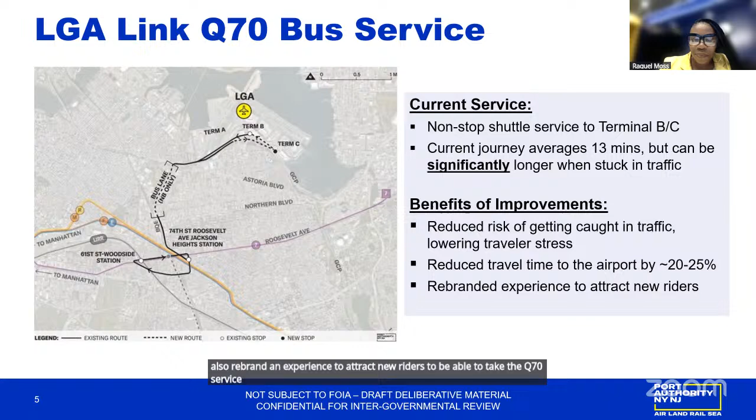To talk about the expert panel recommendations: one was transit signal priority on Roosevelt Avenue and Broadway, which we will discuss later, and will benefit not just the Q70 but other buses as well. A mile-long exclusive lane built on the shoulder of the northbound BQE between Northern and Astoria Boulevard. Frequency improvements as needed, and a new specially designated bus pickup and drop-off area near Terminal C with direct exclusive road access. We'll also discuss our wayfinding and lighting improvements at Jackson Heights-Roosevelt Avenue/74th Street and 61st Street Woodside Station, and lastly, enhancing branding and signage to promote improved services for those who may not currently utilize the Q70.

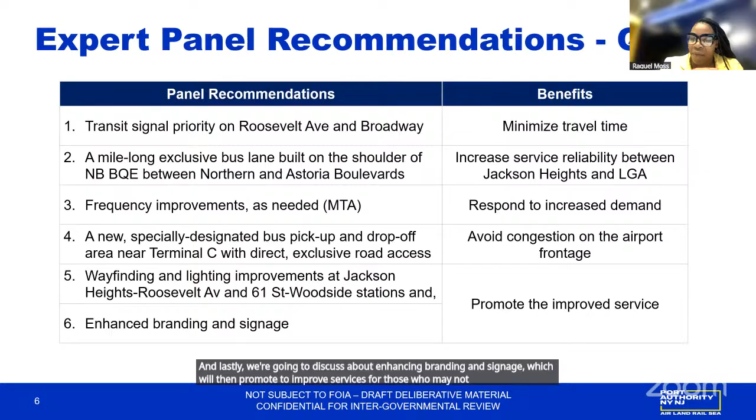Next slide. Now I will turn it over to our Deputy Chief of Government and Community Relations, Hersh Parekh, who will take us further in the presentation. Hersh: Great, thank you Raquel. So I will go over each of those recommendations that Raquel just listed in greater detail. Next slide, please.

So we begin with the wayfinding, signage, and branding. All of you, I hope, are familiar with the Q70 as it currently exists. What we are looking to do is refresh the signage at the subway stations at both 74th Street, Jackson Heights, and 61st Street, Woodside. Also refresh the bus wraps on the buses to make them more visible, more impactful, and easier to recognize, especially for individuals that may not be familiar with the New York City public transit system. This is all intended to help increase ridership on the bus.

So we will be doing this type of improvements as part of this project. These images you see on the screen are conceptual. We're still refining some of these in collaboration and coordination with the MTA. But this is going to be a critical part of attracting new ridership on the Q70, which already is quite popular in terms of access to the airport. In furtherance of our goal to reduce the number of personal vehicles and other vehicles that travel to the airport and encourage people to rely more on public transit, these improvements will help in that endeavor. Next slide, please.

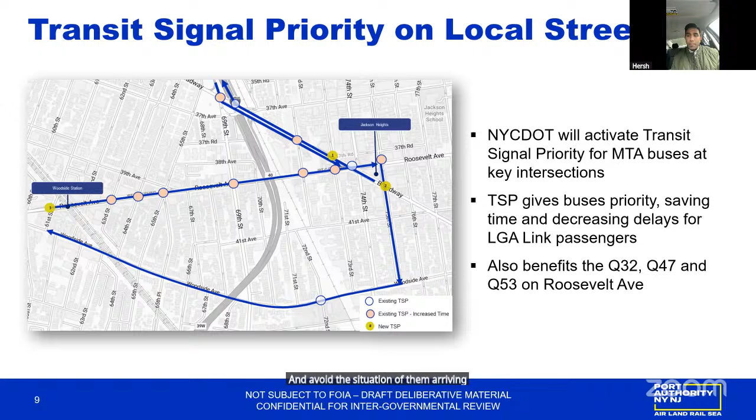As Raquel noted, this TSP will also benefit a number of other bus routes that travel on Roosevelt Avenue, specifically the Q32, the Q47, and the Q53. I'll just note it's critical to highlight the fact that the Q70 is used heavily, not just by airport customers looking to catch their flight, but also by airport employees, many of whom live in the communities around these stations and around Queens. These improvements will help them get to their job faster and more reliably, and avoid the situation of them arriving late or facing any issues because of that.

Next slide, please. I talked about how popular the bus is amongst both customers and employees. You can see on this line graph that ridership on the Q70 has increased steadily over the years, with 2024 being the highest ridership to date. And the fact that it's also free to ride helps significantly to improve and increase this ridership number.

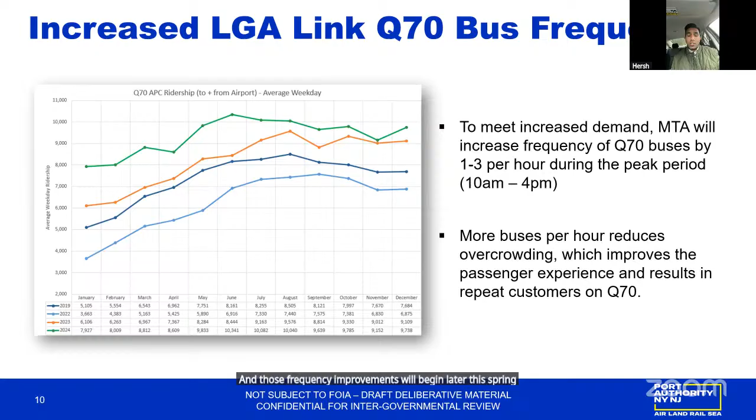As we see this growth in demand, what we want to avoid is buses that get too crowded, especially during the peak period between 10 a.m. and 4 p.m. So to meet this growing demand, the MTA has agreed to increase the frequency of Q70 buses during that peak period. Again, this is all in an effort to increase ridership and increase capacity by reducing overcrowding and improving the passenger experience on the Q70. Those frequency improvements will begin later this spring, sometime in June. So this is right around the corner. Next slide, please.

So here we're going to spend a little more time going into greater detail. Raquel noted the bus lane on the BQE, the northbound BQE between Northern and Astoria Boulevards. This was a critical recommendation of the expert panel, and we do see that sometimes the bus can get caught up in traffic on the BQE as it's going north towards the airport. Because of that situation, many customers on the bus will avoid it because they don't want to miss their flight or be late for their shift at the airport. So we have been working with New York State and New York City DOT to develop a concept that can achieve the goal of a bus lane. We'll go into greater detail on that in the next slide.

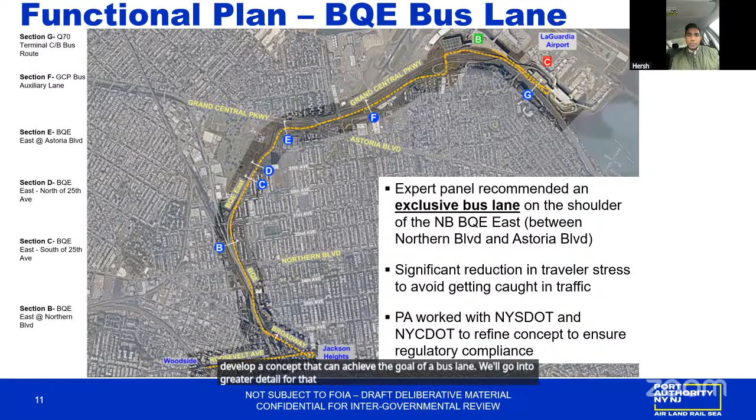So we start at Northern Boulevard. What we will be looking to do is essentially create a bus lane on the shoulder. It is not possible to widen the BQE for many reasons. However, there is a shoulder that currently exists on the northbound BQE. So in order to accommodate a bus lane, there will be some restriping done such that the shoulder on the left-hand side of the road will be narrowed by a few feet, by 3 feet, as you can see. And the shoulder will be widened by 3 feet to accommodate a bus. What's critical to note here is this will not be a full-time bus lane.

This will be a bus lane available only for buses when there is congestion and traffic on the BQE. If traffic is free-flowing, the bus will travel as it normally does on the regular travel lanes. But if there is traffic, slowdowns, and stops, the bus will be able to transfer over to the shoulder running bus lane and continue to reach its destination.

There will be signage added to identify whether the bus lane is active or not, noting it's for buses only. We will work with the MTA to ensure drivers are trained to know when they are able to access the bus lane versus when it's not available.

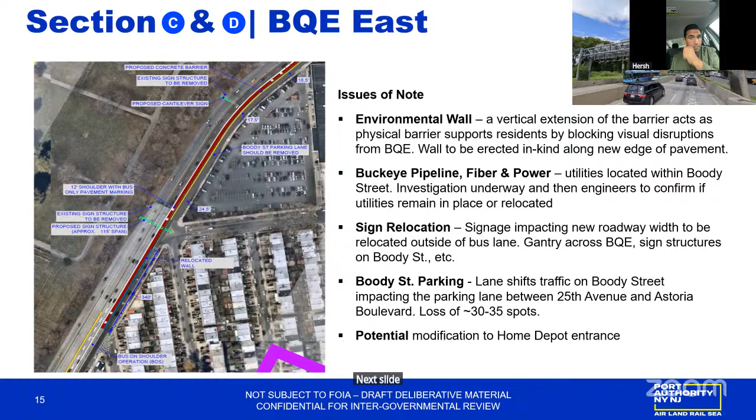So next, after the bus passes 25th Avenue, it will exit and approach Astoria Boulevard. Here, what we will be looking to do is create a bus lane as it exits, allowing it, when it exits the BQE, to have a streamlined pathway to then enter the Grand Central Parkway. You can see the top cross-section image showing current conditions, and the bottom showing the proposed conditions that create a separated bus lane, while still maintaining the vehicular travel lanes on both sides, on both the BQE exit ramp and on Boody Street.

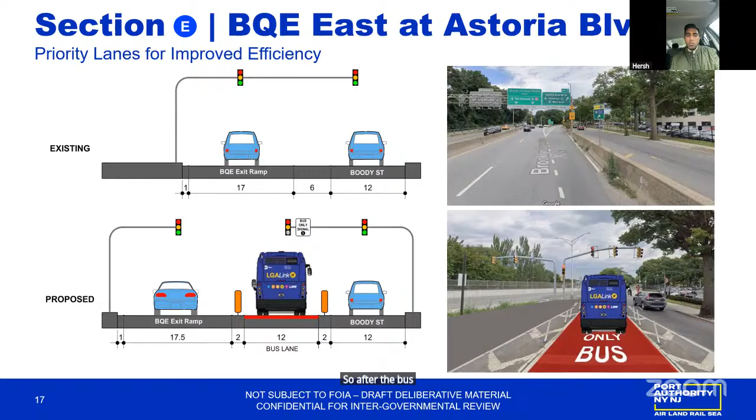This is an area where there are three different signals here, so we just need to make sure one on Boody, one on the Grand Central, on the BQE exit ramp, and one on Astoria. We will work with City DOT to ensure that the TSP can effectively serve the bus while also minimizing impacts on the other vehicular traffic that uses this corridor.

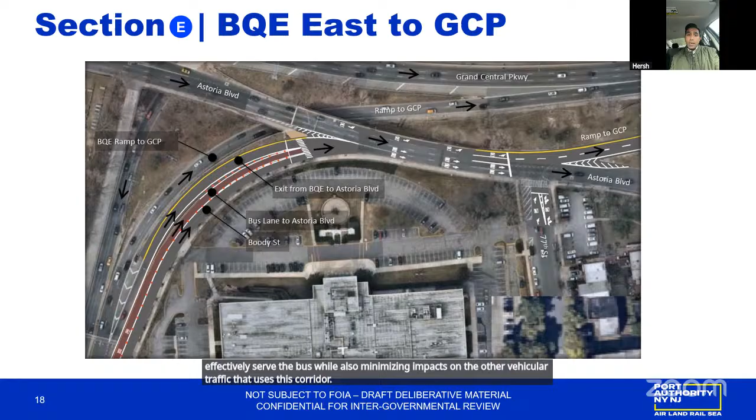So then on the GCP, the bus will enter the Grand Central Parkway on its way to 94th Street. Here, what we're looking to do is create an auxiliary lane. This lane is basically a lane that allows for traffic that is entering at one exit ramp and exiting at the immediate next exit ramp.

So this is essentially the bus will enter the GCP from Astoria Boulevard, and the next exit is 94th Street. This will allow the bus to remain in that lane without having to cross over into other lanes of traffic, allowing it to more efficiently and in a faster way exit the GCP on its way to LaGuardia Airport. This lane is different from the shoulder bus lane I mentioned on the BQE because this lane will be available for all traffic entering at Astoria and exiting at 94th Street. It prevents people from having to cross over, which can be unsafe at times if you're familiar with this interchange. By remaining in one lane from one entrance to the next exit, it allows for more streamlined operation, and again an improved experience on the GCP for the Q70.

And this is just another picture showing how that would work. What we would do is take the existing shoulder and convert that into an auxiliary lane, which would allow the bus to get to its exit quickly.

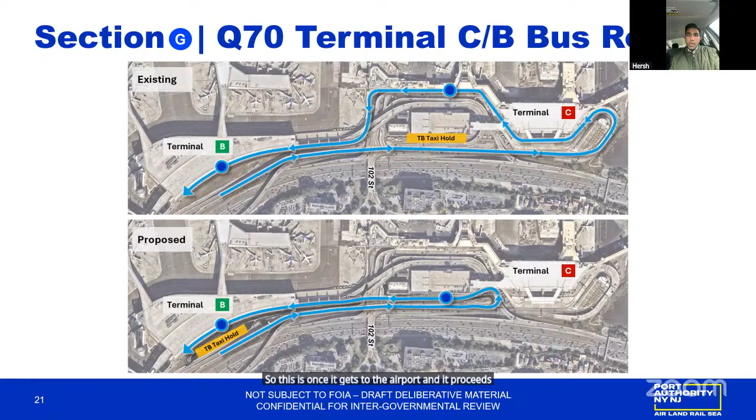So that is the overall project. Let me turn it back over to Raquel to close us out.

Thank you, Hersh. So our next steps are we're going to continue engagement with the community, informing them of the Q70 and the ground access program. Our next meeting would be on May 19th, which is next Monday, with the East Elmhurst Corona Civic Association. And then we're going to still have the planning and design efforts which will continue to propose the new Astoria Ditmars Boulevard shuttle service.

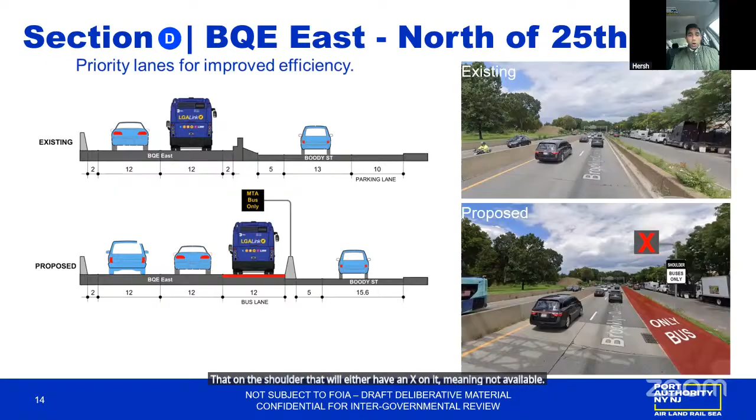If we can go back to that, there will be signage on the shoulder that will either have an X on it, meaning not available, or something like 'bus only lane.' I forget the exact terminology, but it basically says it's available, and that will be based on traffic conditions monitored remotely. So someone watching traffic conditions will know there's heavy congestion or the speeds on the road have dropped below a threshold we haven't quite decided yet, and they'll be able to flip the switch so the sign changes from X to bus only lane, or whatever the language says on the slide. That's how it will be determined.

Okay, great, thank you for clarifying. My follow-up question is simply understanding the times when they are allowed to use that lane.

Are the Q70 buses going to become equipped with cameras? I know there's been an issue with the Staten Island Express buses along the Verrazano and the Gowanus Expressway into downtown Manhattan. They have a purpose bus lane that's sometimes protected with concrete barriers, sometimes not, and anyone who rides those buses will tell you there are often drivers slipping in and out of the lane to bypass traffic. So I'm wondering if there will be any automated enforcement mechanisms to prevent drivers—aside from legitimate emergencies—from simply using the lane to bypass traffic.

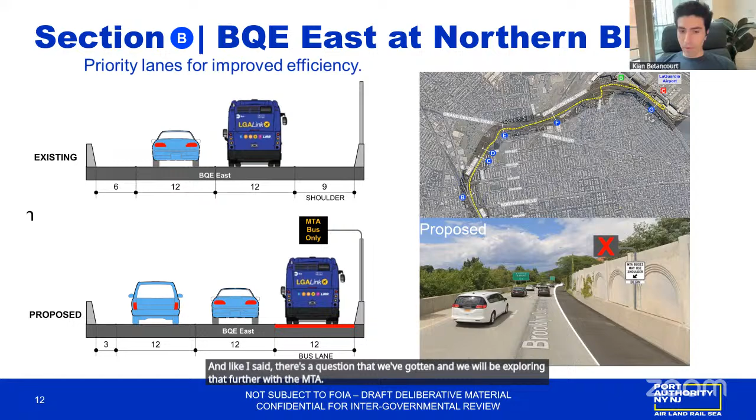This is a question we've received. I don't have an answer for you right now on whether the buses will be equipped with the cameras that can snap a picture if a vehicle that shouldn't be in the lane is using it. I know this is something the MTA has been looking at across their network, but I don't have an answer about whether the Q70s will be equipped with that technology. As I said, this is a question we've gotten and we will explore it further with the MTA.

Thank you. All right, Adam, you're up.

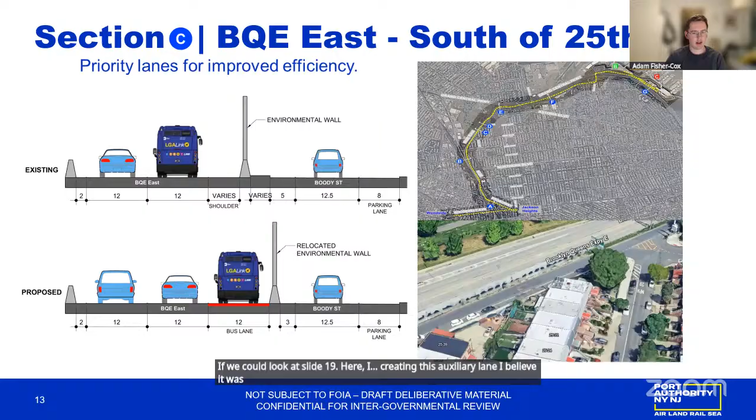If we could look at slide 19, regarding creating this auxiliary lane, I believe in section F, I'm wondering where the space is coming from. It looks like we're kind of widening the highway there, which feels a little counter to the goal of minimizing the amount of cars and traffic in this area. I'm curious what the existing conditions are here, where this additional space is coming from, and what the construction would look like to create this additional space on the roadway.

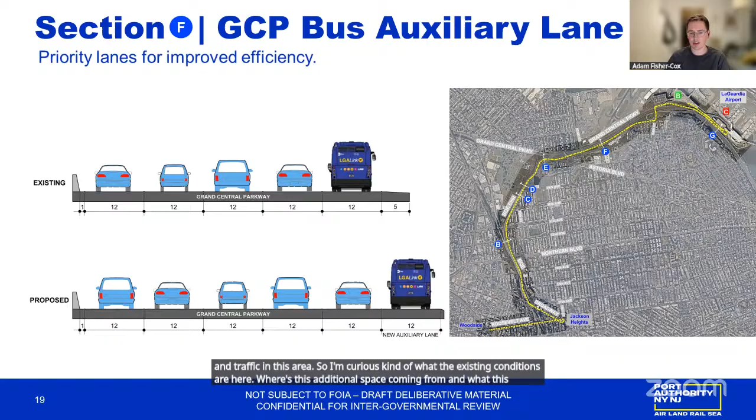Yeah, we can go to the next slide, Louis. You can see on the far right-hand side there's a shoulder area there, which is sometimes where DOT stores equipment for work they might be doing. Oftentimes you'll see a lot of trash in the brush on the right-hand side. So what we're doing is repurposing that area for the auxiliary lane we described.

Okay, so all this is already paved and exists as is, it just needs to be cleaned up and repurposed? That's correct. We've talked again with state DOT—Vaughn College is up there on the hill as well. If this is a way to also reduce the trash that often piles up in those brush areas, I think it's going to be a welcome change. But yes, this is existing pavement, just repurposing it from a staging and storage area for equipment into a proper auxiliary lane for the bus and other vehicles as well, because this is not going to be exclusively for buses—it will be for all vehicles entering at Astoria and exiting at the next exit.

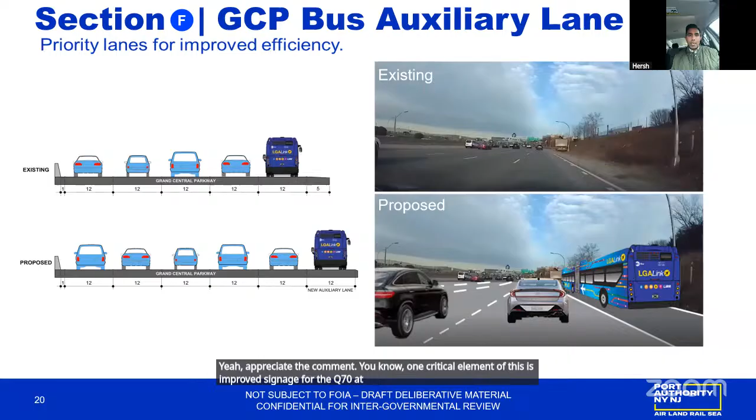Yeah, appreciate the comment. One critical element of this is improved signage for the Q70 at both 74th Street, Jackson Heights, and 61st Street, Woodside. Really highly visible, high impact, colorful, easy to follow, easy to understand - whether you're new to the city or English isn't your first language, just make it easy to understand. So signage, both off the airport at those stations and on the airport, to make the Q70 as visible and attractive as possible, is part of this project.

Okay, sorry. I was just going to say we agree that signage is critical for anybody, whether you've been to LaGuardia 100 times or this is your first time at the airport. So we are always looking at ways to improve the customer and passenger journey, and signage is a critical part of that.

Okay, do you not stack the buses? Because at Roosevelt and 61st, you have the 53, the 70, the 32, and it seems buses are stacking up, waiting to start their route, but it's just adding to the congestion. So if they can be put at an auxiliary site until they start their route, that would be preferred also.

Yeah, appreciate the comment. Again, our focus for this project is improving the journey on the Q70. But we understand and appreciate the comment about the conditions at Woodside, and if there are ways that can be addressed with the MTA, we can take a look at that. But really our focus has been the journey from the subway and Long Island Railroad stations to the airport. Okay, thank you.

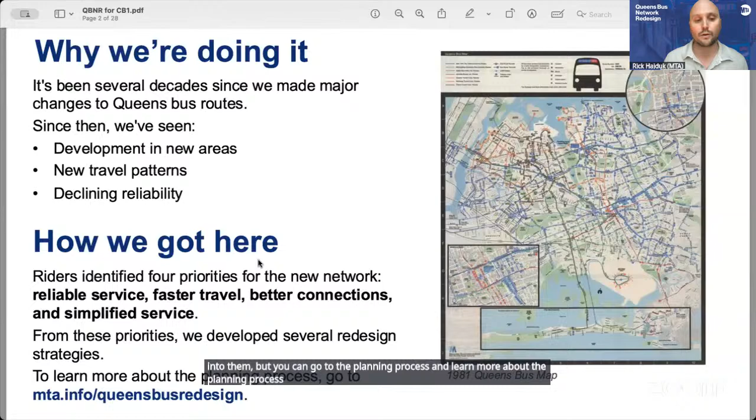So as you are probably all aware, it's been a long time coming for us to implement this project. It is now on our 6th year since launching in 2019. We have developed multiple iterations of the plan, starting with the original draft plan off of the existing conditions report, the new draft plan based off of public feedback, and then the proposed final plan based off more public feedback. And again, after more public feedback, the proposed final plan and addendum, which, as Megan had mentioned, we had published in December of 2024 and brought to the board for an affirmative board vote in January of 2025.

We are now preparing to implement this project, and we're going to all of the community boards in Queens to let them know, give them updates on the implementation process and what to expect. We will be implementing this project in 2 phases, beginning on June 29th. That will be the first phase. The second phase being on August 31st. All of this will be followed by a post-implementation analysis.

This process has been heavily influenced by the community. We've had 250 total events with various communities throughout Queens. This included pop-up events, open houses, workshops, community board meetings, stakeholder engagements, and meetings with elected officials. We received over 18,000 comments, and that's how we got to this point where we brought it to the board, and that's what the new network will look like.

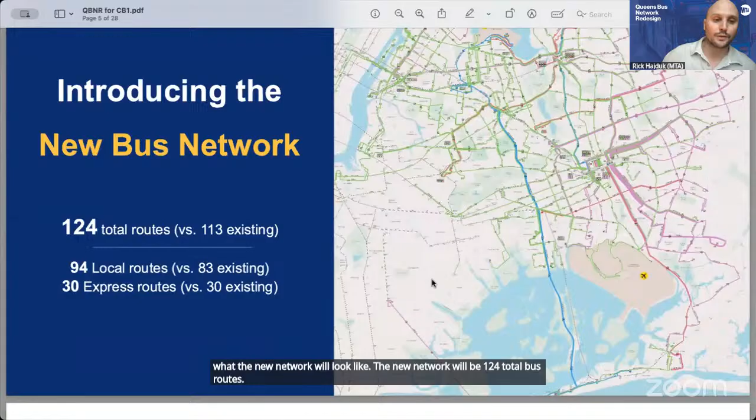The new network will be 124 total bus routes versus the 113 existing. There will be 94 local routes and 30 express routes. This new network will expand access for the people of Queens. 124,000 more residents of Queens will have access to the all-day frequent network, which has a bus that arrives every 10 minutes or better between 6 a.m. and 9 p.m. And 68,000 more residents will have access to the 24-hour bus network after this full plan is implemented on August 31st.

So what changes should riders expect to see? The first thing that people will probably notice is changes to bus stops. We're adding, relocating, and removing hundreds of stops to make rides faster, more reliable, and improve connections. We're changing routes, so we're rerouting some routes for faster and more direct service. And some routes are getting new bus numbers.

We're also adding new routes. We're expanding the network with new routes and extended routes to more areas. And we're introducing the new Rush Route, which is a newly designed route that makes local stops further from the subway. This is primarily in Eastern Queens. And then making more limited stops along the major corridors as you get closer to the major hubs like downtown Flushing or downtown Jamaica.

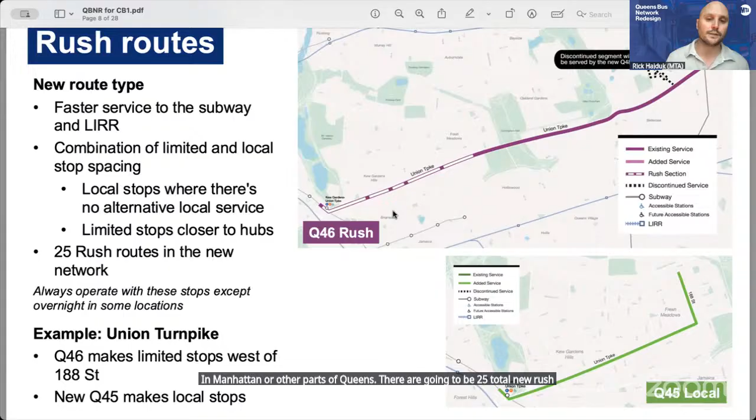There are going to be 25 total new rush routes. Important thing to note is that rush routes like this Q46 will have an underlying local route along that rush segment to pick up local bus customers that need access to grocery stores, doctor's offices, or whatever they might need along that portion of the roadway.

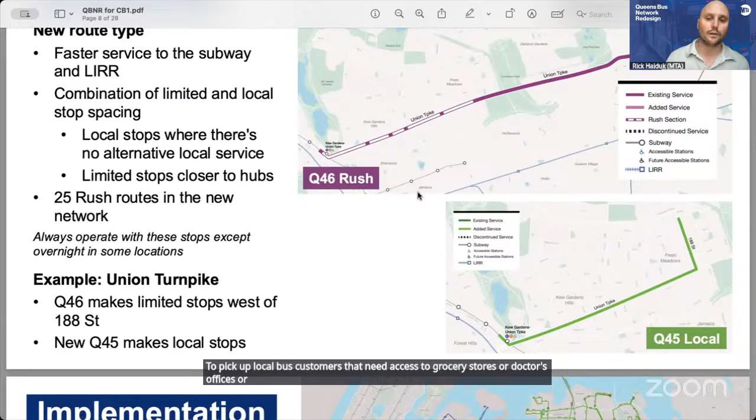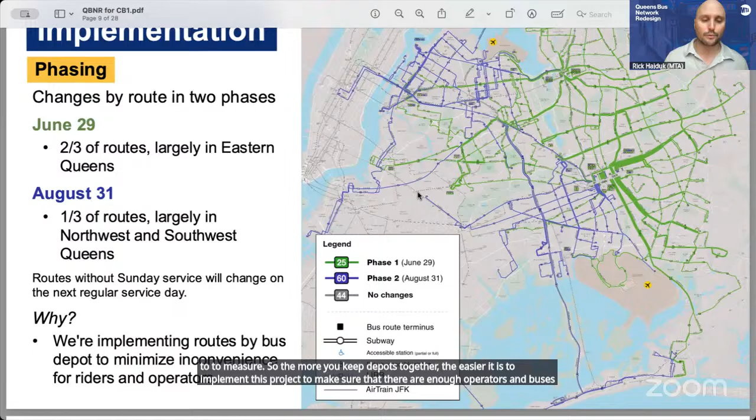The phasing was very complicated. It required quite a bit of effort to limit network gaps, to make sure there were no issues with too many buses laying over in one area due to the changes, and to try and keep depots together because depot capacity is a difficult thing to measure. So the more you keep depots together, the easier it is to implement this project to make sure there are enough operators and buses to properly service the new routes.

So in Community District 1 and Community Board 1, the Q63, which is the new route, will be introduced on June 29th, and any changes to the Q66 you'll be able to see - that's primarily bus stop consolidations. On August 31st, you'll see changes to Q18, Q19, Q60, Q69, Q101, 102, 103, 104, B62, and Q100, which unfortunately I forgot to put on this list. So that's what you can expect to see.

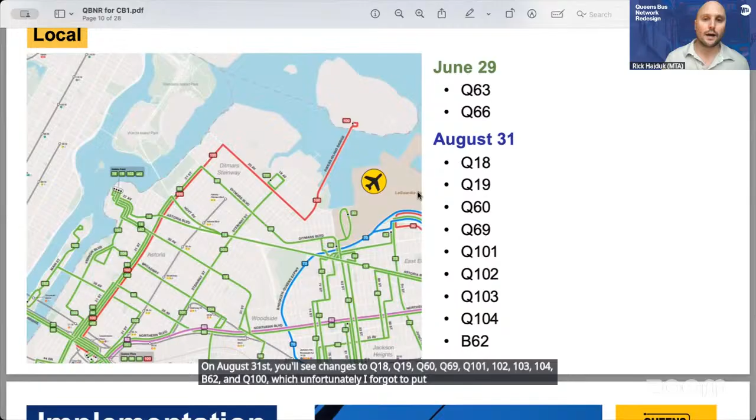You may have already started to see some changes at the bus stop level. The Q66 or Q63, I believe, already has had some changes put in. We are in the process of going through the bus stop changes, which actually began in February, because there are thousands of bus stops that need to be changed throughout the network. It's important to note that service will continue at the stops even if the signage changes - so no routes or bus stops will change until June 29th or August 31st, depending on the route.

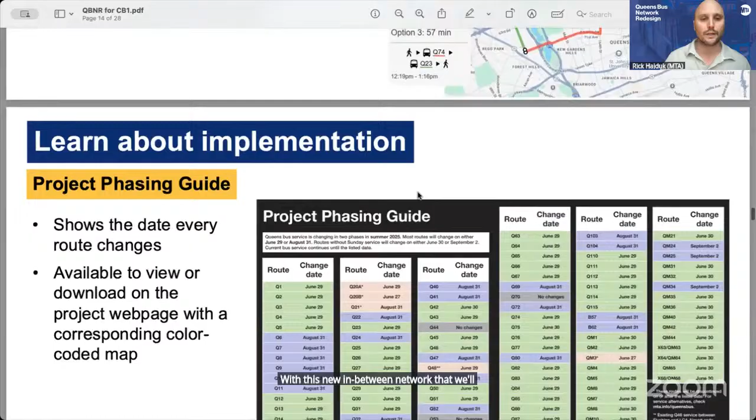We also have a project phasing guide that's downloadable and printable, and it separates out the routes by color and date. The green routes are the ones changing on June 29th. The purple routes are changing on August 31st. The reds are routes being discontinued, and the grays are routes with no changes. So the Q44, 53, and Q70 don't have changes associated with the Queens Bus Network redesign.